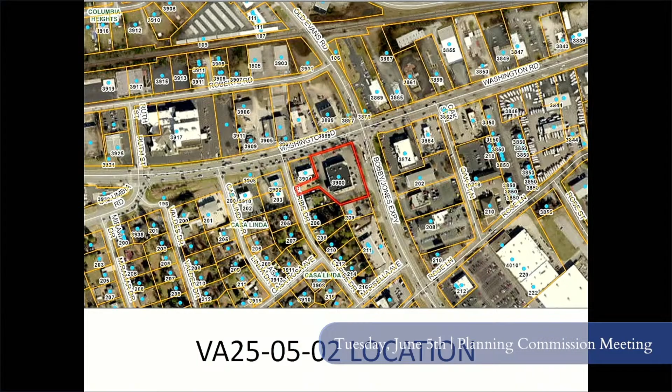This shows the location of the property, again, Washington Road at the corner of Bobby Jones, the intersection with Bobby Jones Expressway, currently a vacant Walgreens. Zoned C2, however, if you recall, the variance requests are all affiliated with the shared lot line shown here with the R3 single-family residential zoning district on the couple adjacent lots.

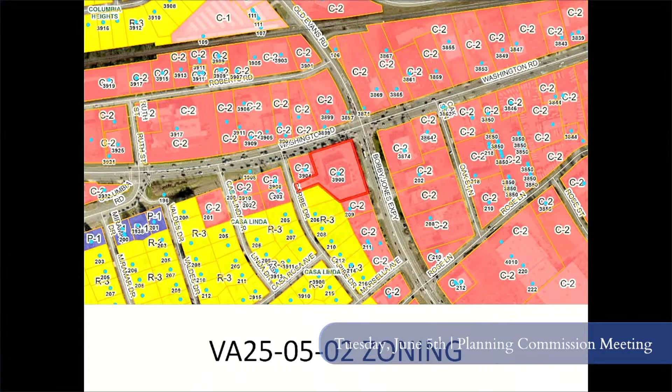An aerial of the site, again, it was previously an operating Walgreens, now currently vacant and proposed for redevelopment by Parkers for a gas station. This is the plat for the property, showing also the access drive that we've previously discussed to Caribe Drive, which is in fact on this.

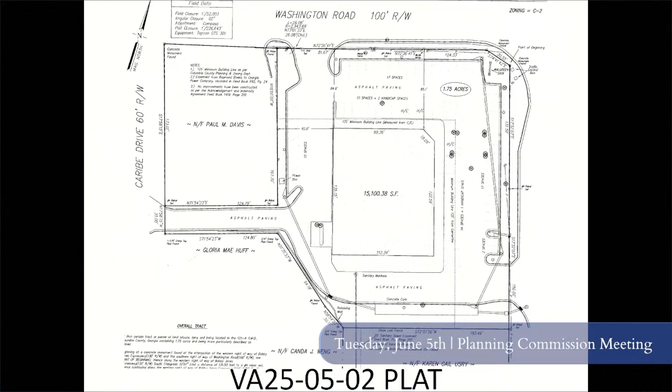And if you remember, our discussion centered around the fact that we had an original application that requested elimination of several separation and buffer requirements affiliated with those shared lot lines with the single-family residential zoning district adjacent to this parcel.

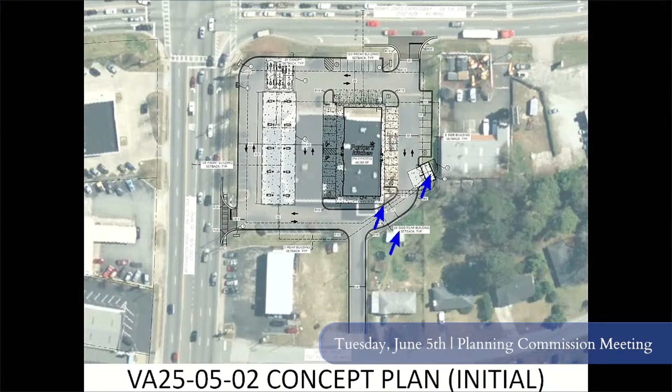This is the original concept plan that they submitted. It's roughly about 35 feet of separation between the building and no additional buffer proposed aside from an opaque fence that's already in place on the property that they were seeking to replace. Of other note is close proximity of parking spaces and the dumpster pad, all very close to the residential lots that share a lot line with this development.

We then progressed to a revised concept plan sent to us the day of that previous meeting on May 15th. They proposed additional landscaping along one of the lot lines, some reduced parking, and an altered location for the dumpster pad further away from those residential lot lines.

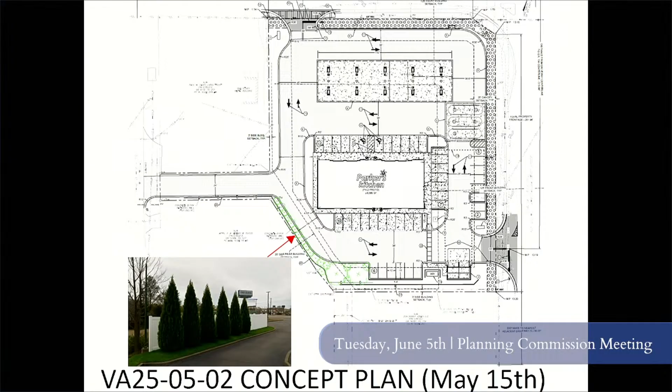Which brings us to a new concept plan that we've received in the interim between that meeting and today, that was sent to us on May 28th. It again widens the proposed landscape buffer there along that lot line, as well as keeps the opaque fencing aspect of a structural buffer.

They won't really be able to buffer there along that driveway that accesses Caribe Drive without reducing that to one lane and causing probably traffic flow issues that maybe don't kind of match the benefit that we would have if we increase the buffer there.

They have proposed, based on conversations they had back and forth with you guys and the public during the last meeting, added some clearance bars along that driveway, though, to try and ensure that any kind of commercial vehicles or tractor trailers won't be using that driveway and circumventing traffic access by going through the residential neighborhood that's adjacent to this development.

They've also, again, reduced parking along the nearest side of the building to that parcel, those residential parcels. They've also reduced the square footage of the building as well to, again, increase the separation.

They're now up over 50 feet, about 54 feet from that lot line. That, partnered with the increased landscape buffering, we think helps and offers a middle ground solution. They've also reduced the size of the fuel canopy down from 10 pumps down to 8. It's a smaller canopy, and it's also further away from that residential lot line.

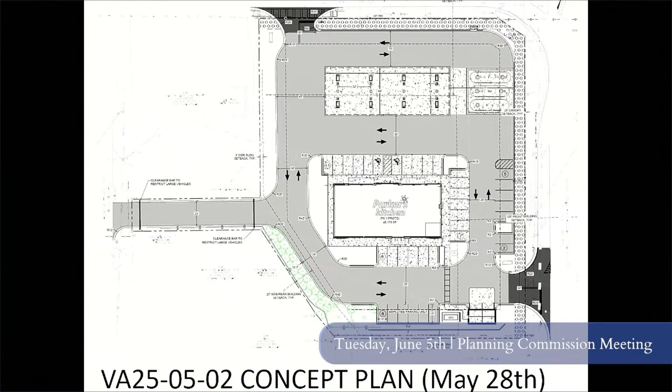It offers some benefit to the adjacent residents. We've also included a couple conditions to clarify that we're not granting a complete elimination of those separation or buffer requirements for any further development on the site going forward. We are conditioning that the reduction of those requirements is reflected here in the site plan. So they will be held to 16 feet of landscaping affiliated with that buffer and the 54 feet of separation affiliated with any structures that are part of the operation of the gas station here on the site.

Beyond that, we also have a condition that we're proposing that any lighting be shielded away from those residential lot lines, and that a photometric plan is submitted along with their site plan. Provided those conditions are met, staff is comfortable in recommending approval with those conditions.

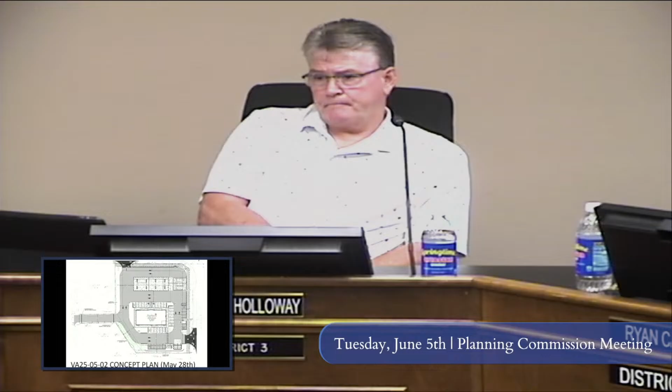With the 9 to 10 foot mark, think about a drive-through lane at a fast food restaurant. One thing I wanted to clarify on that last comment was that the intent is to block all commercial trucks outside of an F-250 style truck used for commercial purposes. But commercial box trucks are also intended to be limited by these bars, not just 18-wheelers.

What is your purpose for having that road? Well, it's an existing road, really, and it just provides more access into the development, I think for all the same reasons that y'all have identified here.

Sometimes it could be hard to take a left out of this. I say sometimes, probably all the times. It's hard to take a left on either. On Washington Road, it's going to be very difficult.

Scott, is that a county deal? That wouldn't be their deal, right? Since the last meeting, I've had a chance to talk with traffic engineering and the county engineer about concerns of intermingling the commercial traffic with the residential area, and options that might be available. One thing we discussed was the concept of making that a cul-de-sac or dead-ending it at the depth of the commercial along Washington Road, and that really wasn't a viable option in the eyes of the county engineer.

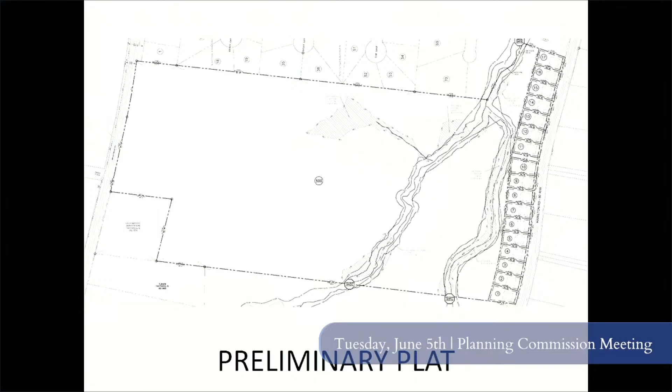The minimum lot size is 19,860 square feet, which exceeds the requirements for the R2 zoning district. The required setbacks are 55 feet from the center line of the road and 10 feet from the side and rear property lines, and staff is recommending approval.

The owner applicant of Edgar Houston Builder Incorporated would like to come forward and speak on behalf.

Tyler Finley, Houston Homes, 6053 Veterans Parkway, Columbus, Georgia. Much like Dylan did earlier, I can't really offer very much in addition to what Danielle's offered, but I'm happy to answer any questions. Do y'all have any questions?

Okay, thank you. Any other member of the audience would like to speak in favor? Just to clarify, the preliminary plats are not public hearings. Oh, I'm sorry, you're welcome to invite public comment, but you don't have to. I apologize, I was carrying on my business.

I have a motion. Mr. Chairman, I make a motion to approve the preliminary plat for Hamilton Grove Phase 1 off Hamilton Road. Second. I have a motion and second. All those in favor, raise your right hand. Motion carries.

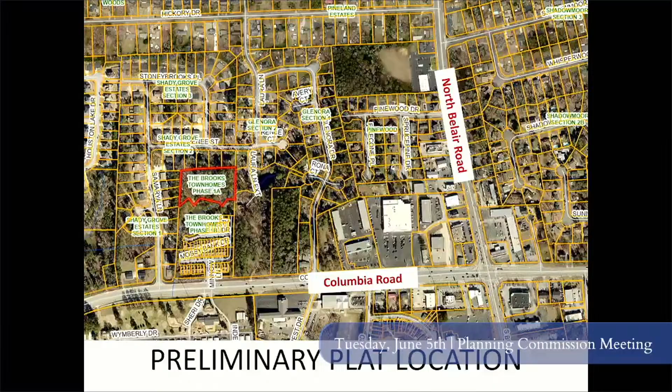Brooks, Phase 2. Yes sir, this is the preliminary plat for Phase 2 of the Brooks Townhomes Development off Columbia Road. This is the northern section of this property, and it is the final phase of this development. It was rezoned to TR back in 2005.

This section includes 20 new townhouse lots, generally in groups of 3 or more meeting code. The exception is the 2 down here at the south. Due to the environmental features here, it makes it kind of difficult for them to do 3 attached there.

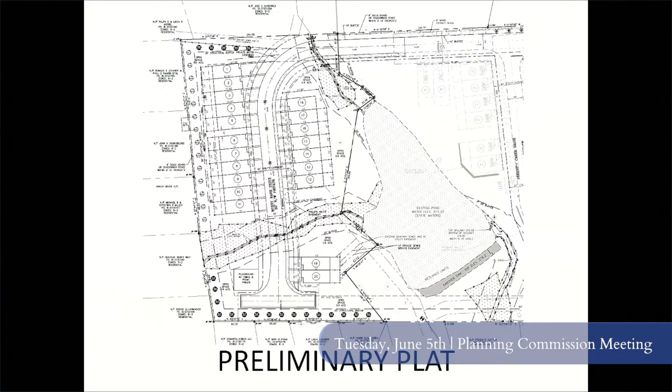The 2-attached pattern is not a defined use in the county code, but it is an existing development pattern in Phase 1 of this project and has been determined to be acceptable for them to continue that pattern with this section. This section also includes 1.2 acres of open space, including the required play area for the development. Staff is recommending approval.

Thank you, Danielle. Do I have a motion? Mr. Chairman, I make a motion to approve the preliminary plat for the Brooks Phase 2 off Columbia Road. I'll second. I have a motion and second. All those in favor, raise your right hand. Motion carries.

Four Oaks, Phase 5, H2B3. Yes sir, this is the preliminary plat for Phase 5 of the Four Oaks off Stablebridge Way. This shows the location of the site off Hereford Farm Road.

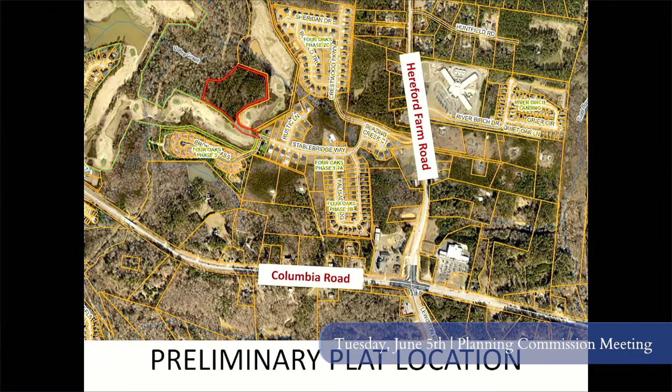We saw this not too long ago for some variance requests related to the buffer around this section of the development. This section includes 16 single-family lots with a minimum lot size of 10,230 square feet and an average lot size of 11,960 square feet, which meets the requirements of the R2 zoning district. Minimum setbacks are 55 feet from the center line and 10 feet from the side and rear property lines. There is 2.67 acres of open space in this section, and sidewalks and street trees are to be provided on both sides of the road.

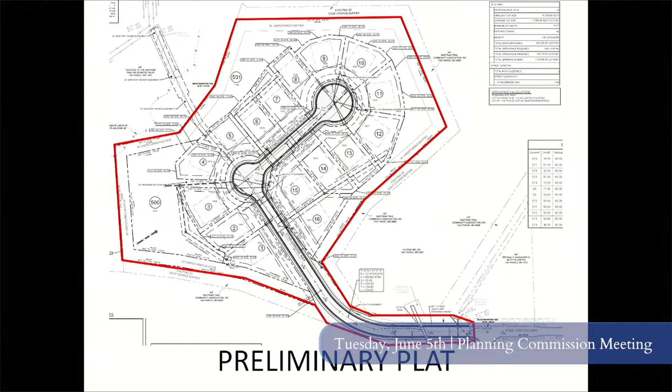They are complying with the variance conditions, both for the crossing of the extension of Stablebridge Way across the golf course and with the 30-foot undisturbed buffer that was approved with the more recent variance. Staff is recommending approval.

Thank you. Do I have a motion? Mr. Chairman, I make a motion to approve the preliminary plat for Four Oaks Phase 5 off of Hereford Farm Road. A second. I have a motion and second. All those in favor, raise your right hand. Motion carries.

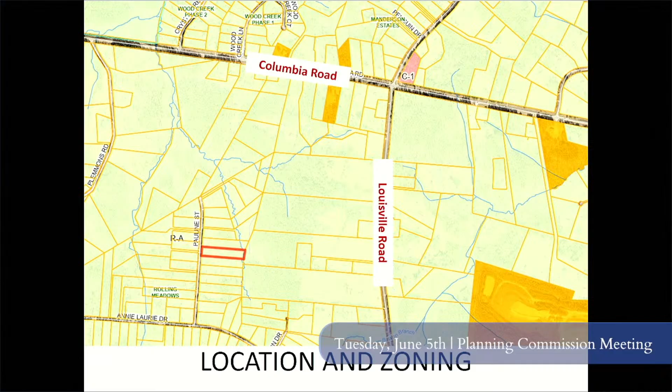Public hearing. Provisional home occupation. Yes sir, this is a provisional home occupation for Jeff Alexander's Home Improvements at 130 Pauline Street. This shows the location and the zoning of the property. It is off Louisville Road, not far south of the intersection with Columbia Road, and is currently zoned RA Residential Agricultural, as are all of the surrounding properties.

The applicant is intending to operate a home improvement business and is using a portion of the existing shed on the property for storage of the tools related to that business. Obviously, storage of tools in a shed is a very typical use. If this was not a home business, we obviously wouldn't see this.

But for the home occupation, to use that shed as part of the storage for the business does require review and approval. Again, not an uncommon use. There's no customer traffic to the site or anything that should create any impacts on the adjacent properties. So there's no concerns with the proposed operation of this business, and staff is recommending approval.

Thank you, Danielle. The applicant owner, Jeffrey Alexander, if you would like to come forward and speak. Any member of the audience would like to speak against this?

Do I have a motion? Mr. Chairman, I make a motion to approve the provisional home occupation for Jeff Alexander's Home Improvements at 130 Pauline Street. Second. I have a motion and a second. All those in favor, raise your right hand. Motion carries. RZ 25-0601, change of conditions.

Danielle? Yes, sir, this is a request for a change of conditions for property off Hamilton Road and Wrightsboro Road. This property is currently zoned R2, single-family residential, but is undeveloped at this time, although we did just see the preliminary plat for Phase 1 of this project.

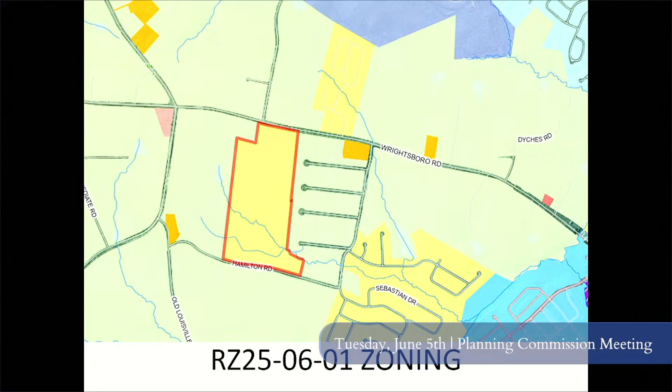Again, currently the property is undeveloped. There is a concept plan to develop this as an R2 subdivision. Again, we just saw the preliminary plat for the first phase off Hamilton Road. So the left turn lane requirement is going to impact the next phases that are going to come in off of Wrightsboro Road. And the applicants are requesting to remove that condition requiring the left turn lane, at least partly on the grounds that DOT is going to put a roundabout in at this intersection.

You can see their entrance is designed to align with Baker Place Road, so it will effectively be the fourth leg of that intersection. DOT has confirmed they are planning to put a roundabout there, but they are at least 3 years out from doing that.

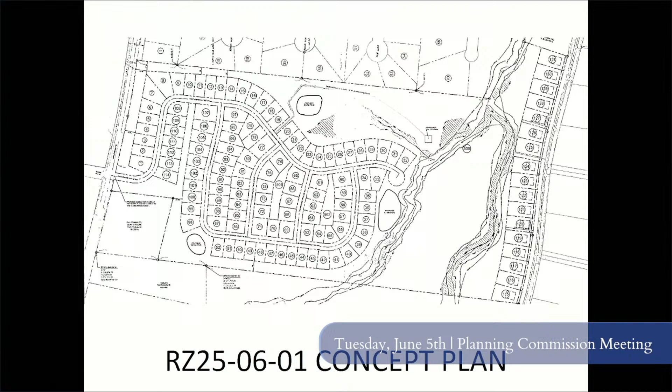So the concern is that if the subdivision moves forward prior to the roundabout being in place, the existing traffic conditions that led to that condition being adopted will still be a concern. So what we are proposing, instead of removing the condition, is to modify it to essentially provide the option of either waiting for the roundabout to be in place or installing the left turn lane if the development wants to move forward before DOT completes their project.

So staff is recommending approval with that modified condition that either the roundabout or the previously conditioned left turn lane must be installed prior to approval of the final plat for the first phase of the project that uses Wrightsboro Road for access. Thank you, Danielle.

Owner Jack Houston, Moxley, Dearth, or applicant Tyler Finley would like to come forward and speak on behalf. Thank y'all. Tyler Finley, Houston Homes, 3 Veterans Parkway. I don't know if I repeat that every time, but to Danielle's point, we don't know exactly our timeline for the following phases. So we're just asking that we be able to work with the county and GDOT.

The left turn lane may not be something we have to do, or it may be cumbersome if GDOT comes in and installs a roundabout. We'll work with everybody to control traffic and make sure we do what we need to do, whether that's a fourth leg or whether that's a turn lane, whatever changes.

You're okay with the turn lane, putting the turn lane in, because usually GDOT's probably, if they say 3 it's more like 5. Fair enough, we work with them across the state, so yes, sir, whichever works best for the county. But certainly, however GDOT or the county wants to take care of that, we'll comply with that.

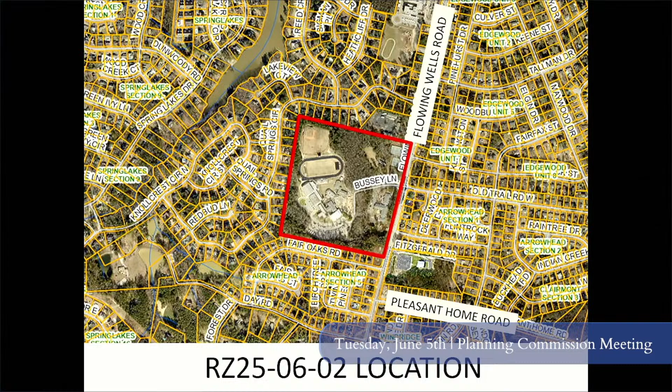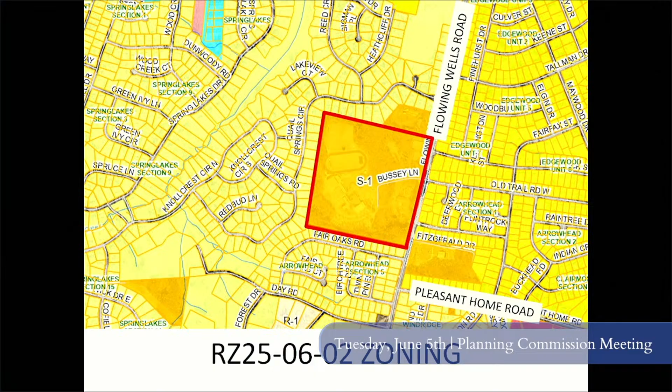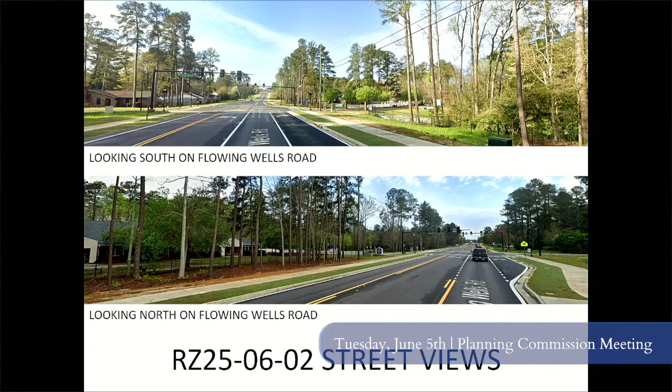So the school is proposing the rebuild of the entrance. They're going to reuse the existing metal gates, and the structures will be brick walls and brick piers in a quality design that matches a lot of the new buildings on the campus.

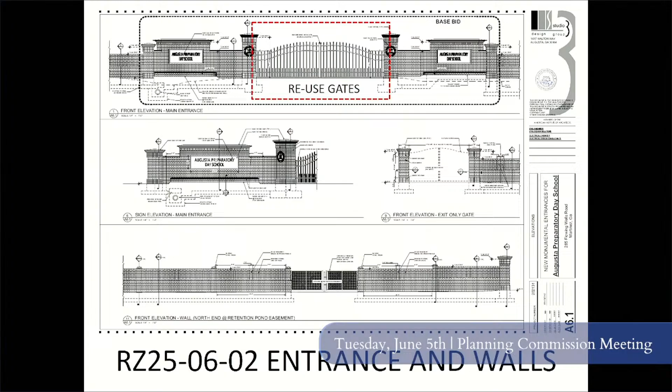And the site plans have been approved with the conditions. It shows the location of the wall, and the brick columns range from a height of 6 to 13 feet.

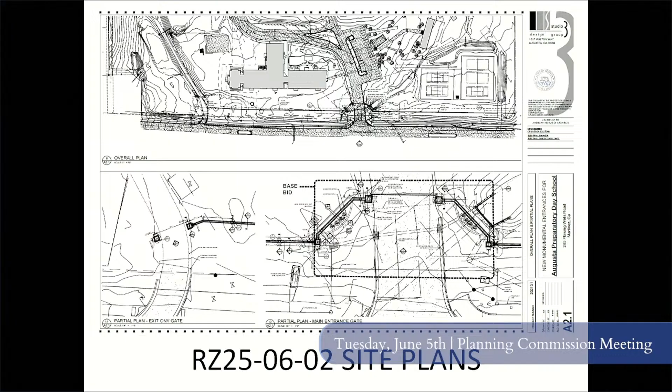This is a view towards Flowing Wells Road. It shows that the entrance is approximately 5 to 6 feet below the road grade, so the impact of the additional height is not great on the public views.

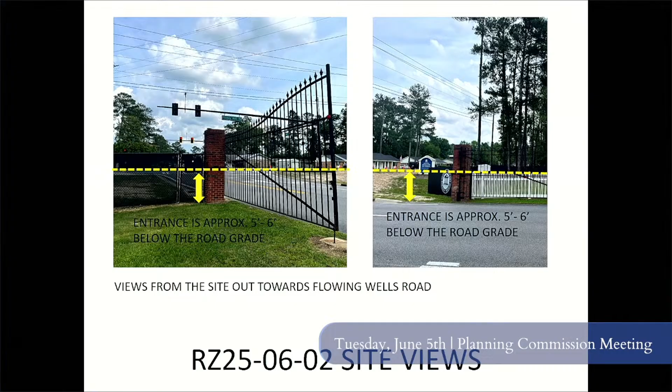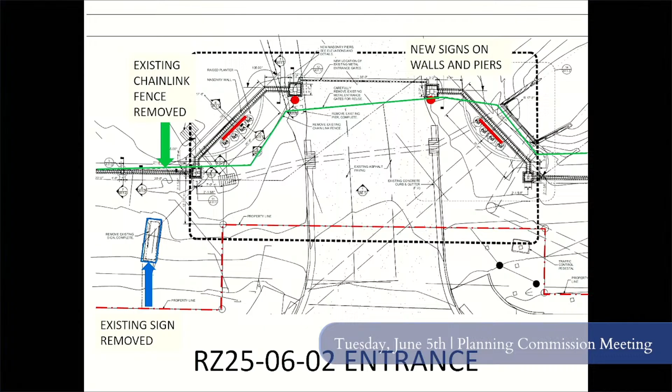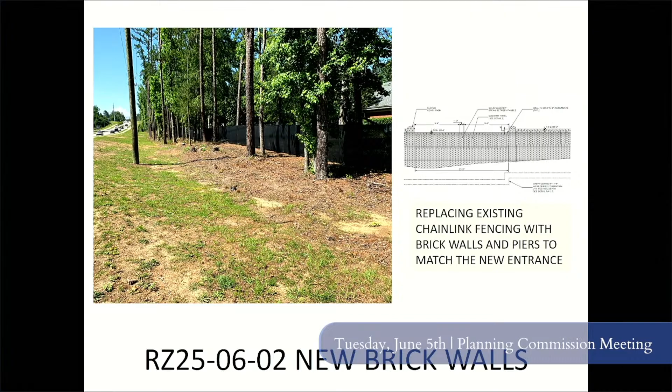The frontage on Flowing Wells Road does have some chain link fencing that will be removed and replaced by the brick walls and piers. This is the sign on the left that's been removed. You can see the existing entrance there.

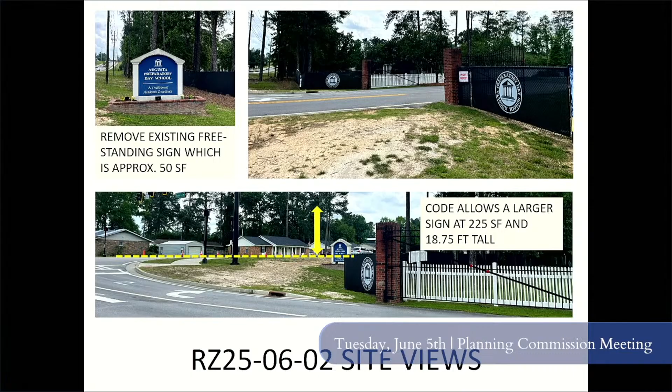The sign code actually allows a larger sign than what they have there already or what's proposed — it could essentially be about 18 feet tall, but that's not what they're requesting. The drawings show what signage is being proposed.

These are the entrance signs. There will be 4 signs, with a total area of about 130 square feet, which is a lot less than what the sign code allows, and it's arranged symmetrically around the entrance.

Staff doesn't have any major concerns with what's proposed and recommends approval with conditions. The wall height variance applies to finished masonry products only, as proposed in the plan provided with this application. The approved height does not apply to chain link fencing, and there will also be an easement encroachment agreement prior to the approval for the fence and signs.

This was envisioned once the Flowing Wells improvements were happening, that we would take a step toward this. No questions — I like the looks of it. Yes, it looks very nice. It took some other opinions to get here, so I'm excited for it. I appreciate that.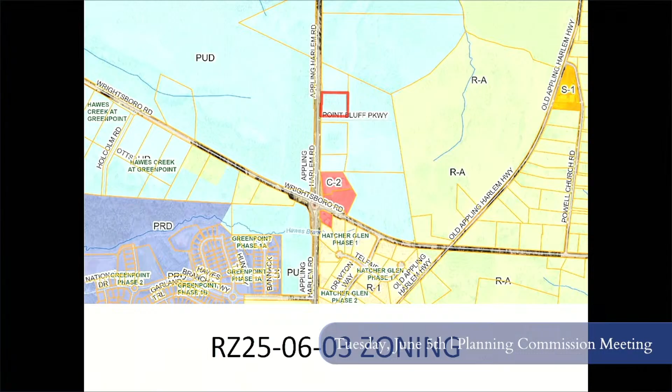This side of the road, as well as the adjacent parcels, are all slated for some form of commercial development and use. This request is based on the fact that even in commercial zoning, this is an additional use, which means we have to go through this review process with public hearings to receive plat approval for the property. Again, this shows the multi-tenant structure and which suite they're seeking to use.

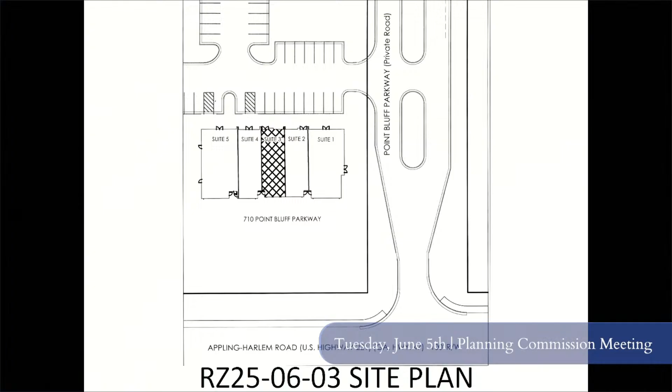Code does allow for liquor stores to make use of a drive-through if applicable and able, but as you can see from the site photos as well as the rendering of the development, given that they're using the central suite in that structure, there's not really that opportunity at the moment. I don't believe there will be in the future, but just be aware.

These are the renderings, again, of the structures we already just saw. Liquor stores are conditional uses that are also subject to additional conditions in the county code for separation requirements from various other public uses, things like churches, public parks, and things like that.

Schools, shown here, are the separations that were surveyed as part of the alcohol sales license that the applicants are seeking. The closest of these public uses is Harlem Middle School, which is over 2,000 feet away. Those separation requirements for everything except other liquor stores are just 1,000 feet. They meet all of those requirements.

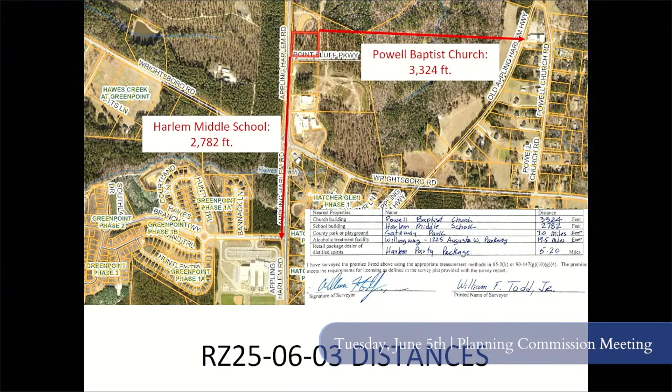The closest other liquor store, shown on the next slide, is more than 5 miles away. So again, this request satisfies all those distance separation requirements. On the future development map, this is also within the mixed-use activity center, which does make allowance for commercial development. Again, everything from the zoning to the future land use line up for development.

This is an allowed commercial use, provided they receive conditional approval. And so that is why we're seeing the major request for this, and staff is comfortable with it and recommending approval. Thank you, Dylan. The owner, Greenpoint PCD LLC, or applicant Krupa Patel, would like to come forward and speak.

Good evening. My name is Krupa Patel. Address is 303 Clearwater Lane, Grovetown, Georgia. Thank you, I don't want to say anything else.

Okay, do we have any questions? I got one for Dylan. Dylan, you said something about the drive-through. Most of them are supposed to have drive-throughs according to the county, or?

No, they're not, that's just the intent. There's an allowance in the code. But again, you can see that this building is already built out with no drive-through lane in sight, so we don't believe that this is reality with this development.

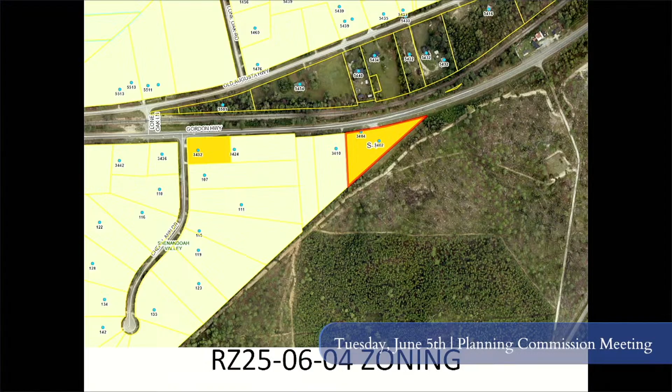And shows the current zoning of the site, again, currently zoned S1. Everything else is primarily RA. We do have another church over here as well. And again, aerial view of the site is from the hurricane aerials, actually.

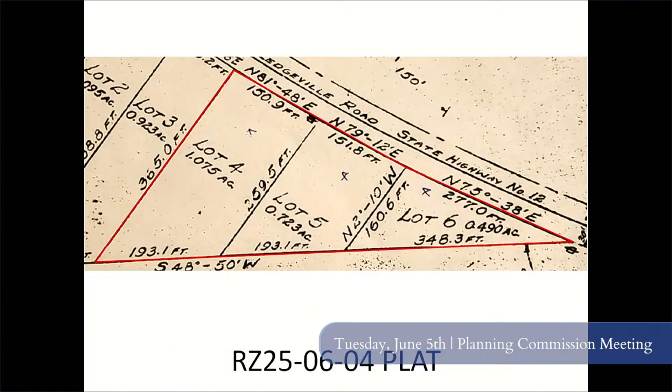The site itself, and the plat of the property, it is technically 3 lots combined, but this is the old plat. So what they're looking to do, there's currently an existing sanctuary on the site. There is this building over here that is in the GDOT right of way. We're gonna pretend it doesn't exist. It's fine to be there, but it's not really part of this whole discussion.

The request is for this 2,000 square foot fellowship hall over here, and then also a proposed parking lot in the middle that will be paved for approximately 50 parking spaces. And also you have the detention pond over here. They would then put in buffers as needed on the site itself, meeting our landscape requirements. Pretty straightforward request, to be honest with you.

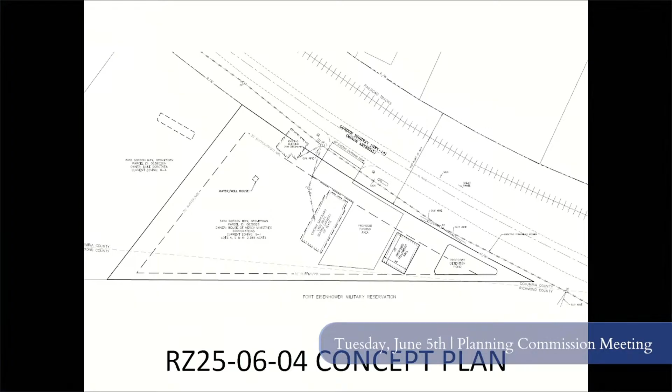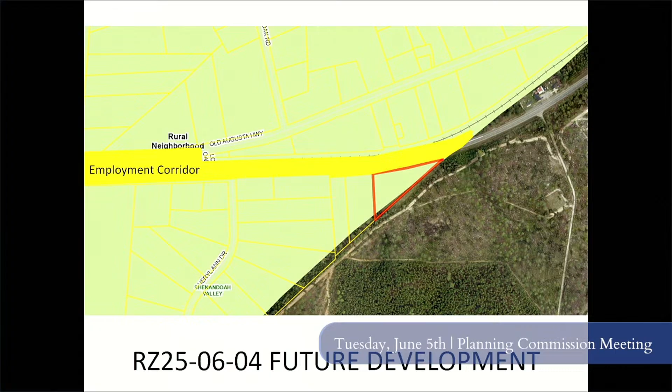In terms of the building itself, they will be submitting what that's going to look like with the building permit for our review, likely to be very similar to the fellowship hall itself. In terms of future land use, we're within the rural neighborhoods area, but also along the employment corridor. Churches, as we talked about, can pretty much go where they please within Columbia County in regards to future land use, so it does meet the intent of the future land use map. Taking all this into account, staff recommends approval of the request.

Will the owner of the House of Mercy Ministries Corporation, or applicant Matane Robinson, would like to come forward and speak?

I'm not Pastor Robinson, I'm Bill Quarter with Blue Water Engineering. I'm the project engineer on behalf of the church tonight, 4210 Columbia Road, Martinez. And like Will said, this is pretty straightforward. Fortunately, the church is growing and they need some more space for a fellowship hall, and they'd like to be able to build one on the property. It's an unusually shaped piece of property, so had to get a little bit creative, but I think we came up with something that makes sense.

Glad to answer any questions you might have. I have none. Do y'all have any questions? I have none. Thank you. Appreciate it. Any other member would like to speak in favor? Is there anyone here in opposition?

Can I get a motion? Mr. Chairman, I make a motion to recommend approval of file RZ 250604, major S1 revision to add a fellowship hall and parking lot to the property at 3402 Gordon Highway. Second. I have a motion and a second. All those in favor, raise your right hand.

Motion carries. We have RZ 250605, rezoning of S1 to R1. Danielle? Yes, sir. This is a request for a rezoning of approximately 1 acre portion of the property at 5164 Mill Branch Road. This shows the location of the site at the corner of Mill Branch Road and Lewiston Road, just south of Columbia Road.

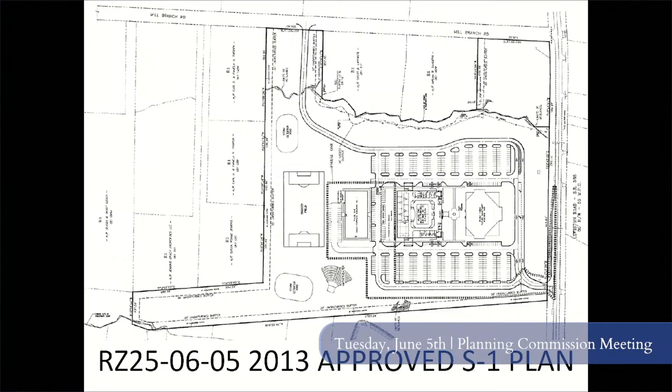This is the approved S1 plan from 2013. You can see the corner we're discussing has nothing planned on it, so this property basically is zoned S1 with no defined use. Like I said, the mobile home predates the S1 zoning, but is not addressed under the S1, so it's in a bit of a limbo situation where it's zoned S1 with no approved use.

So rezoning it would correct that. The intent is to subdivide this property off from the S1, so rezoning it to R1 gives it some lot standards to follow to make that subdivision possible. It also rezones it similarly to other residential properties around it. It will remain a non-conforming use. Under R1, we don't typically allow manufactured homes in that zoning district, but it is an existing residence. The houses on the adjacent properties are also manufactured homes, so it's still very much typical for the area.

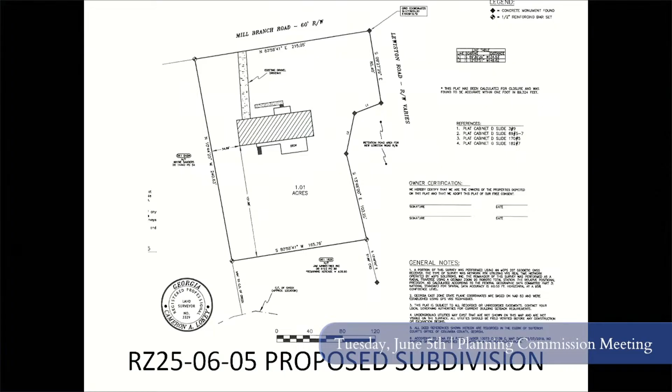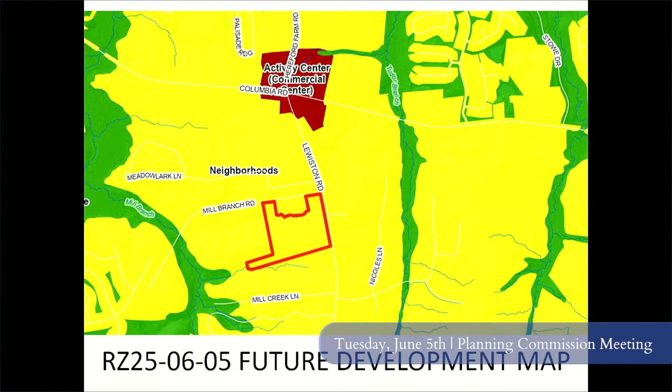It is in the neighborhood's character area. This is primarily intended for single-family residential uses. The church, as a civic use, is also fine there, but obviously this corner of the property is not being used as part of the church. It has been in residential use, and staff is recommending approval of the rezoning for this portion of the property.

Okay, thank you, Danielle. The owner of Jam Ministries Incorporated, or the applicant Barry Allen, would like to come forward and speak.

Any questions? Thank you. Any other member who'd like to speak in favor? Is there anyone here in opposition? Can I get a motion?

Mr. Chairman, I'd like to make a motion to recommend approval of file RZ 250605, rezoning a portion of the property at 5164 Mill Branch Road from S1 to R1. A second. I have a motion on the floor and a second. All those in favor, raise your right hand. Motion carries.

Okay, file RZ 250606. That's me again. Danielle, go ahead. I'm trying to get back to my screen here. Danielle, go ahead. Yes, sir.

This is a request for a rezoning of two properties off Columbia Road from planned unit development to S1 special, for a proposed solar farm. This shows the location of the two properties on the south side of Columbia Road, across from Patriots Park and Bartram Trail, kind of backing up to Ivy Falls and High Meadows.

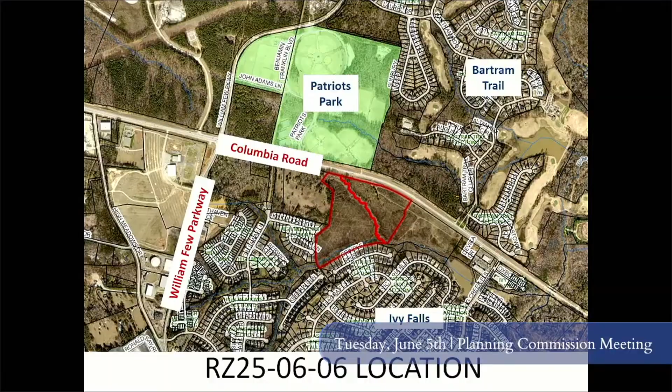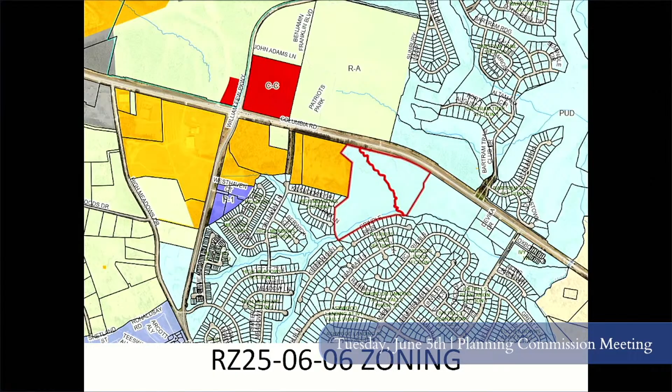The current zoning of the properties is planned unit development. We'll see the existing site plans in a moment, but they are currently zoned for a mix of townhouses and commercial and professional development. Currently, they are undeveloped. There is an existing stream at the southern end of the site. The site is currently undeveloped.

This is the approved development plan from the existing planned unit development zoning. The more southwestern property is zoned for townhomes, and the northeastern parcel is zoned for a combination of commercial and professional development.

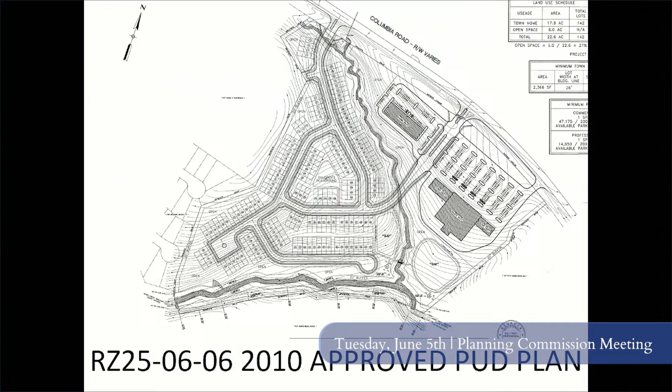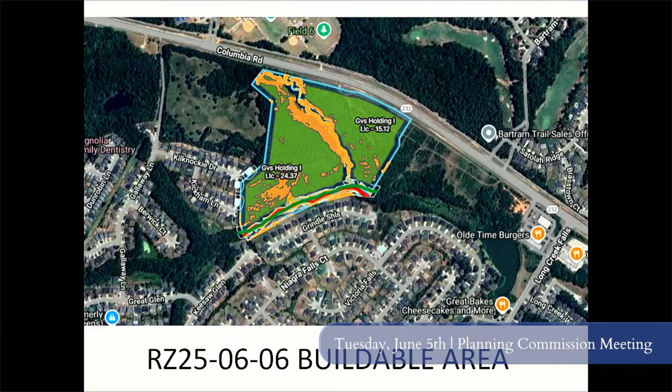The applicants have submitted some technical documentation, including a buildable area analysis. These properties do have some significant topography that has made them more difficult to develop in the past. This is an illustration of that, and we'll see with the site plan they've left those areas that are more steeply sloped alone with their proposal.

The proposal is to develop a solar farm on this property. They are showing building setbacks and buffers around the site, with a minimum 50-foot setback and a minimum 25-foot buffer. Typically, we would recommend that those be larger.

As far as county code is concerned, a solar farm is essentially a major utility. That's going to be the most similar thing in our code, which is an industrial use. So we typically would require larger buffers than that, particularly where it's adjacent to residential property. We would also, and have with previous solar farm applications, required larger setbacks from the road with the intent of shielding it, screening it, making it less visible. So we do have some proposed conditions if this were to be recommended for approval that would speak to those concerns with the setbacks and the buffers.

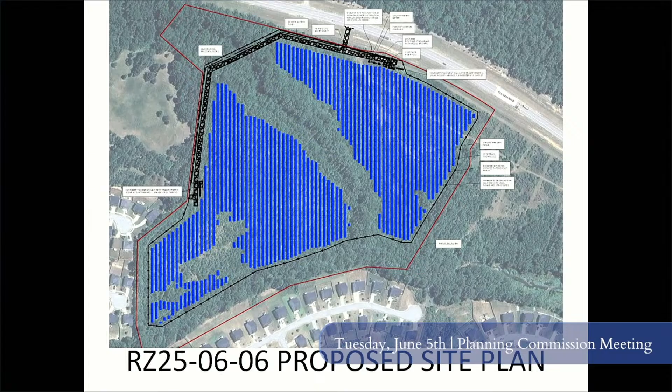The applicants have also submitted the capacity maps, and again, this is the technical side of why they are proposing to put it here. This shows the available hosting capacity that Georgia Power has to accept the power from this proposed solar farm. Georgia Power would be the entity purchasing that power from this site.

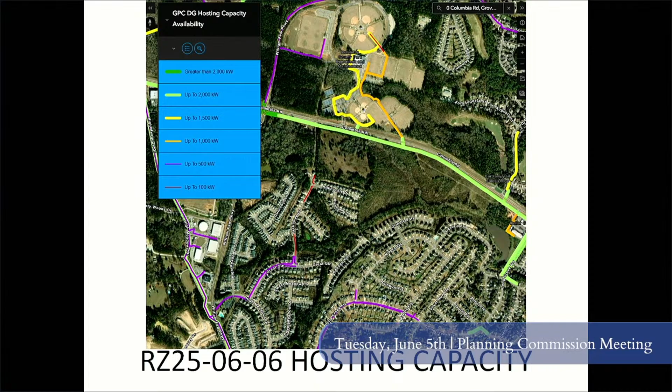In terms of future land use, this is in the neighborhood's character area. This area is intended primarily for single-family residential type development, and this area in particular has quite a bit of residential development. We're starting to see the commercial and civic development out here with Patriots Park, with the fairgrounds, with the sports facility that's proposed next door.

This type of industrial use, while it sometimes does need to be in these neighborhood character areas -- we do have to have cell towers and some other industrial things near neighborhoods at times -- would be better placed not on a major road and not in this kind of densely developing area. So based on that, staff is recommending disapproval of this request.

The owner of GVS Holding LLC, applicant Vision Solar LLC, or anyone speaking on their behalf may come forward. My name is G.B. Sharma. I've been a resident of Columbia County for the last 40 years. I've developed several pieces of commercial and residential property and helped the county create a big tax base. I acquired this piece of property from Abram Sarata in 2007.

I've paid more than $1 million only on interest on this property. I've had several offers on it, but as Daniel said, given the topography of the property and the difficulty and cost of developing it, all those contracts have not gone through. I've also paid almost $10,000 to $13,000 a year in property taxes. I think with all the problems we hear about global warming and...

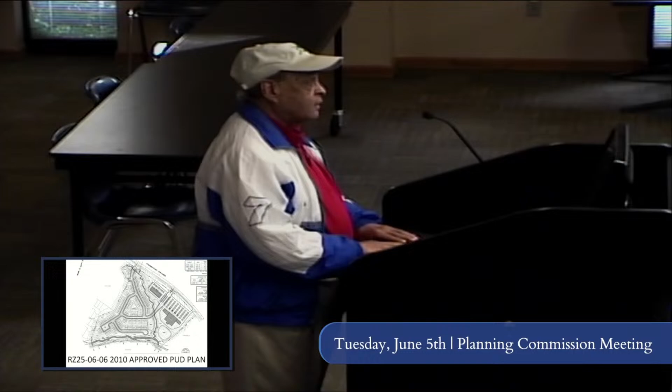I do. So you've had this property since 2007? Yes. And people have offered money to do something else, but it's probably not enough, are you saying? Well, it was originally approved in 2007 for 254 townhomes, and that did not work. Then I got it. At that time, the county refused to give me partial commercial zoning. So when they agreed to give it to me, I partially rezoned it commercial and left part of it as residential.

I've had contracts from D.R. Horton Homes and any number of builders. Everyone looked at it and everyone said it's not cost effective. Also, when I approached DOT and got the driveway permits, given the frontage it has, almost 1,100 feet, I was asked to put in an extra decel lane and also 3 separate driveways, which killed this deal completely.

So I would urge upon you that you approve this with whatever conditions you want to impose to protect the neighborhood and the community. But if you don't approve, I'm 79 years old, and I'm going to pop off in a few years. I'm going to leave it to my grandchildren, and you will not have any tax base or any development.

But did you get in touch with the solar company, or did they get in touch with you about this property? Is it ideal for this? He will answer, he is present here. Okay, all technical questions Mr. Warren Kritko would answer. He's present here.

Thank you. My name is Warren Kritko. I'm here to represent Vision Solar. So did you get in touch with him, or did he get in touch with you? How did it work?

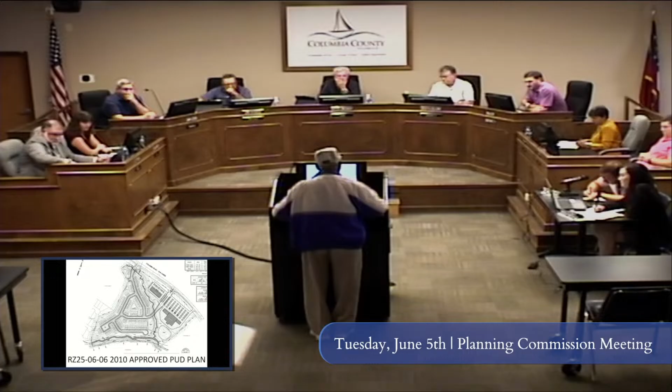And number three, I don't know how much these ladies have invested in the neighborhood. About over a $10 million investment in Ivy Falls. I should be more worried about the value of my investments in my properties. I own the two strip centers, one I built in 2005, the other I built in 2007. And I still own 3.4 acres right next to it, which is eventually going to be developed. But given all these headaches and bureaucratic procedures we have to go through, I've pretty much given up on it, and that's why I want to sell it and get out.

And I don't believe that putting a solar farm would be environmentally detrimental. I think somebody has to probably read and do their homework before they claim that a solar farm is going to be detrimental to the clean environment. I have never seen, never heard, or never read it anywhere. Thank you.

And then, just to address a few of the other comments that I heard, the Department of Energy and the Chinese components portion - that is something that we're already planning against. We have US-made components for the inverters and the important infrastructure components of the solar array. That should already be in the plan that you'll be able to see.

As far as being able to see it, our goal is to put a buffer, not only in space, but also trees, foliage and stuff around it to actually block the view and make it as aesthetically pleasing as possible, so you cannot view it from both the road and the neighborhood. There would still be a good portion of the trees and stuff that are there. So I think it would probably look relatively the same from the views of the back of the neighborhood, because we don't plan to come inside of that. And we're happy to have that as part of our plan, just to ensure that.